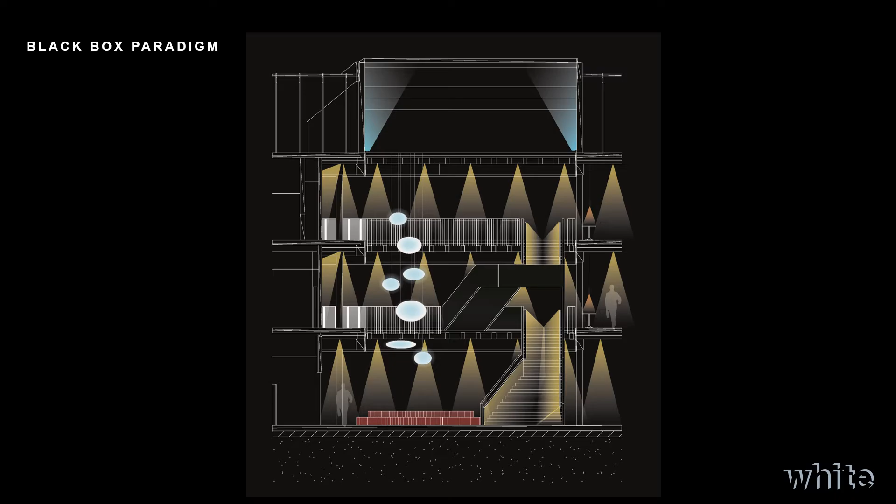We believe that it's about time that we drive a change of paradigm and acknowledge that we don't live in black boxes, luckily for us, and that any lighting design strategy must include natural light as a crucial part of it. Ultimately, daylight is where everything starts.

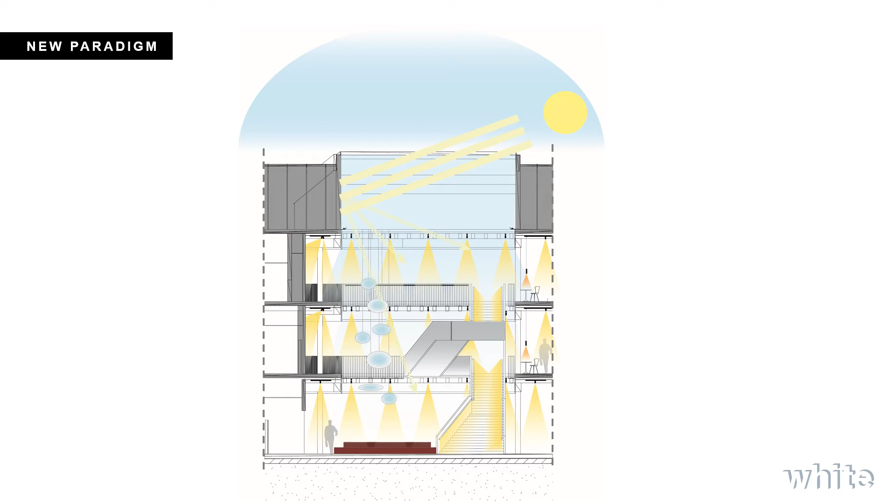So 2 years ago, we started to investigate a standard building design process with the aim to identify where, when, and how the question of light, both natural and electrical, should be addressed at the different stages of the process. We also looked more in detail at possible workflows between architects and specialists inside the project to create synergies, beneficial and crucial in the process of delivering the best possible solutions, starting with creating a common strategy for light, running daylight analysis, feeding that information into the lighting design concept, choice and placement of fixtures and controls, and then feeding back with information the system for energy and CO2 simulations.

My colleagues at White have actually developed an easy-to-use tool called Inform, which is a plugin through Rhino for architects to easily analyze daylight at early stages when comparing different building volumes, which already is a big development towards ensuring better daylight in buildings.

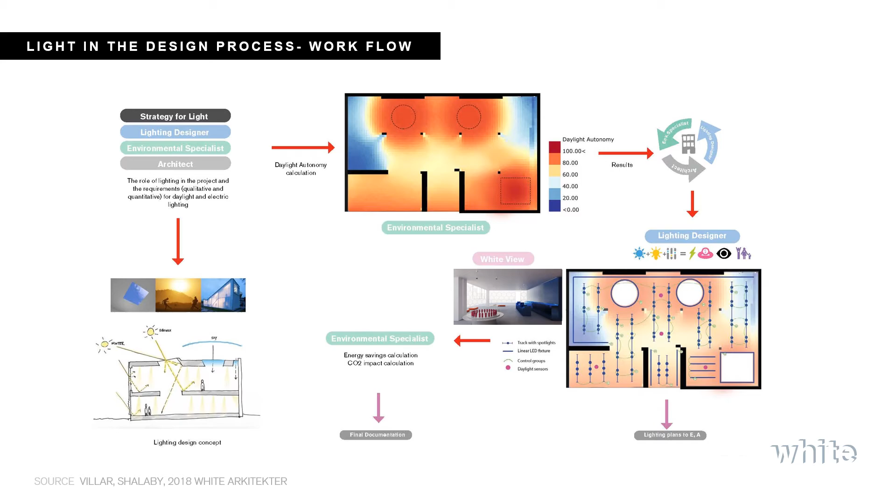We then tested this workflow in a bigger project, an office building in Malmö, to be both LEED and WELL certified. Here, daylight assessments were run to comply with the requirement for BBR, the Swedish building regulation, which the building did pass, and sDA, spatial daylight autonomy targets, stated in LEED and WELL, which the building did not pass, mainly due to the sky at this latitude being mostly overcast, the scarce daylight hours during wintertime, and the low angle of the sun causing glare problems and higher needs for dynamic shading.

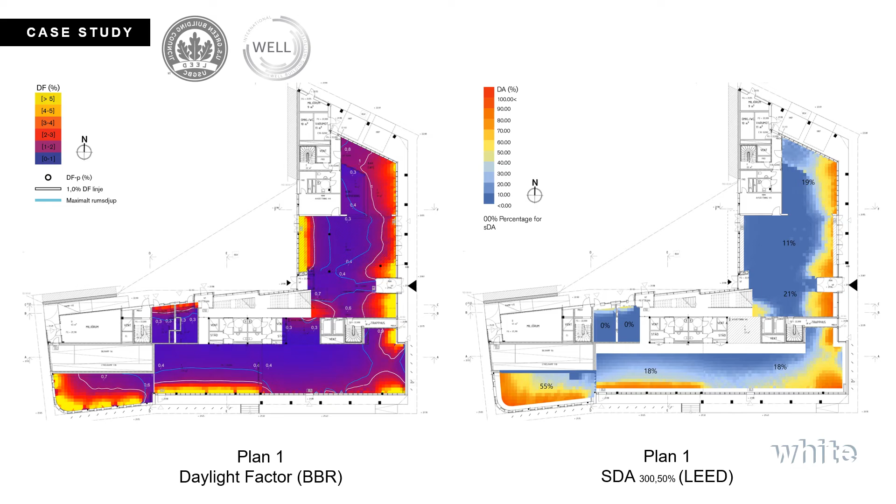However, the spatial daylight autonomy assessment still provided useful information to lighting designers for the placement of sensors, grouping of luminaires, and programming of different light scenarios.

Through an automated script, we also evaluated the view-out credit for WELL, where at least 50% of the regularly occupied spaces should have views with a vertical view angle of at least 30 degrees. This evaluation, even though it did not consider the quality of view, is still very useful in informing the design team about the minimum requirements for view out, which directly affects both the building design and interior layouts.

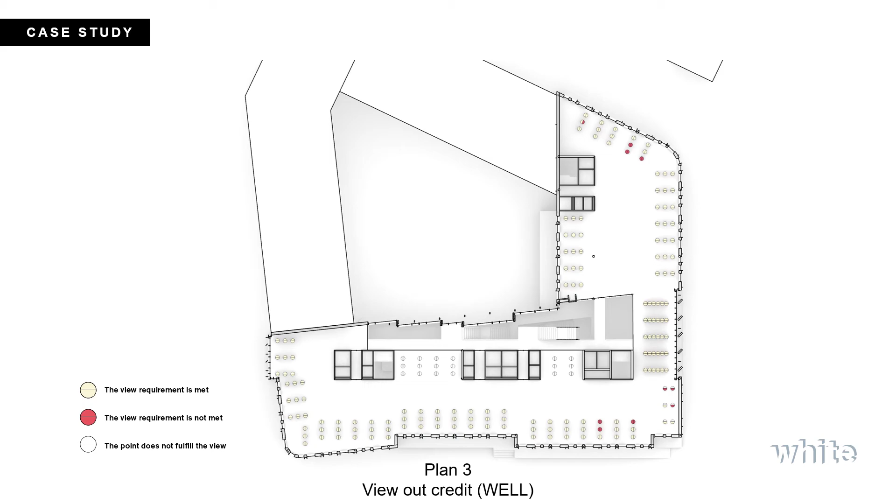EML targets in the WELL certification depend on points achieved in the daylight enhanced access feature, meaning that the more daylight availability regularly occupied spaces have, the lower EML values from electric lighting are to be achieved. Niko Gentile already explained in the previous lecture more in detail what EML values mean and how they are calculated.

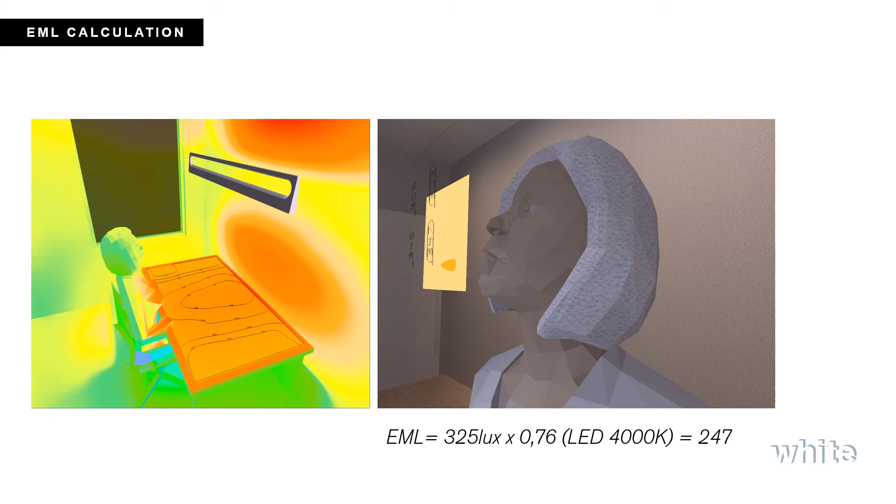Early in the design process, we identified the contradiction between having high amounts of light at eye level and risk for discomfort glare, this being one of the biggest challenges when it comes to both ensuring visual comfort and circadian lighting.

Just to assess this in a more reliable and responsible way, we visually assessed over 8 luminaires comparing lux at horizontal and vertical planes, color rendering, color temperature, and most importantly, visually assessing glare and shadows. We found that this was a crucial step in our design process, and in feeling confident that the choice of luminaire and placements was a responsible one based both on digital tools and visual assessment.

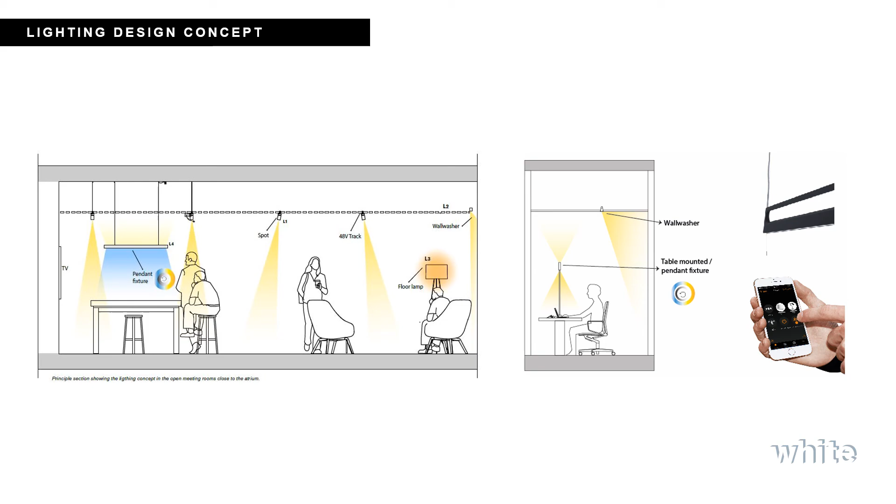After these studies, we were able to define the different lighting principles for both the regularly occupied spaces and non-regularly occupied spaces, as well as ensuring that the lighting design strategy complies with the lighting power density requirements, with the majority of regularly occupied spaces complying with the watts per square meter allowance, with results ranging from 5.4 to 10 watts per square meter.

Later in the project, we investigated the impact that changing our proposal with pendant luminaires for ceiling-mounted fixtures would have. The results showed that when achieving the same EML values, the potential for energy savings from a pendant solution versus a ceiling-mounted one was 20 to 45%. Solutions where circadian lighting is mounted close to the users are to be preferred not only due to visual comfort advantages, but also energy consumption.

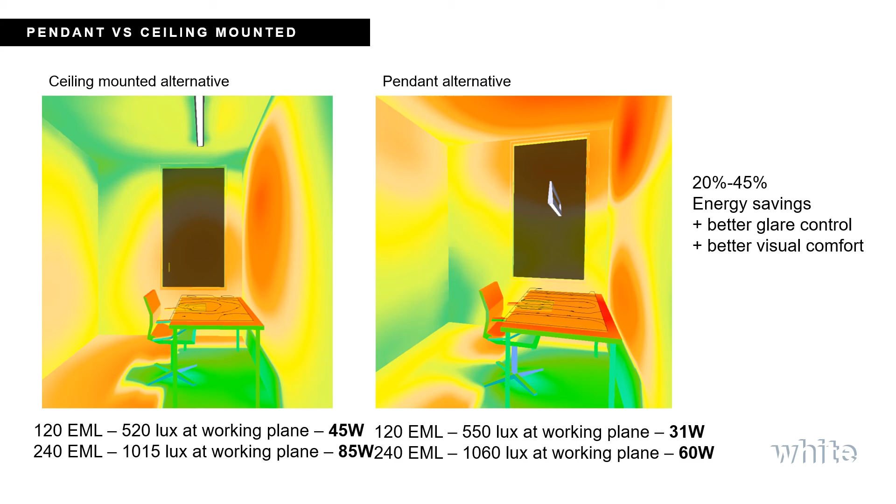Combining daylight and lighting for health and well-being asks for a different workflow within the project team, where design and verifications for daylight and electric lighting, interior layouts, and the development of the architectural space itself need to be developed simultaneously hand in hand.

When trying to achieve circadian lighting with good glare control and optimal energy performance, it is crucial that the lighting is coordinated with the placement of regularly occupied spaces, implying that it can no longer be developed as a homogeneous layer of light across the floors without jeopardizing energy performance and visual comfort.

This stresses the importance of maximizing daylight in buildings. Daylight is by far the best light source we have. It is also free of cost, doesn't require any wiring, and is the light source we are made for. Encouraging interdisciplinary work to provide lighting solutions that integrate both natural and artificial light is needed now more than ever. Thank you for listening.